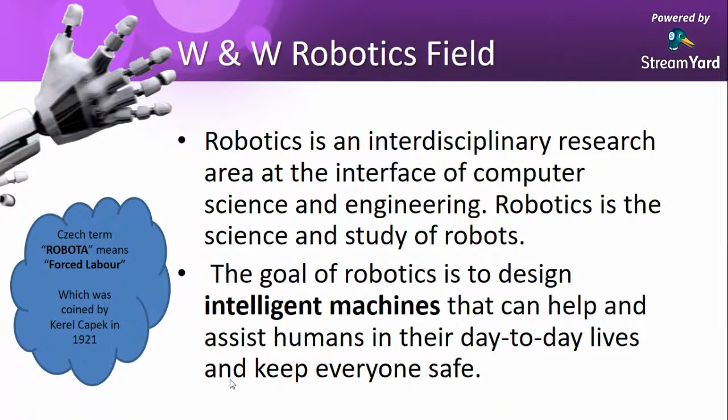We have different fields which I'm going to showcase in this presentation: kinematics, gears, programming, system thinking, environmental thinking, and all these different technical and scientific fields which collaborate and integrate together, and the resultant is used to implement and solve some problem. That is robotics - a complete merger of all different fields.

It's not a standalone field. It's a merger of different technologies, different engineering fields, different scientific fields - that's designing and art and all this stuff. If we have a piece of iron and it's not looking good, you won't buy it. I will show you about the Pepper robot - it's very beautiful, and all that.

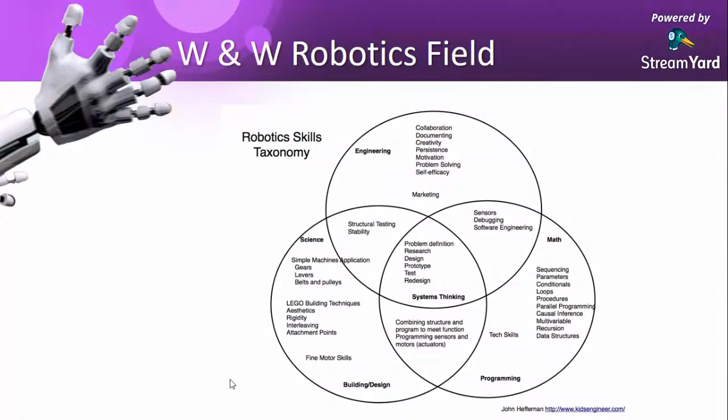Amazon has an average warehouse size of 400,000 square feet area, which is composed of about 73 canal in Pakistan.

The person doesn't go there, because imagine it's 73 canal minimum - Google and Amazon's website say the average size is 400,000 square feet. Just imagine if you had to go and pick that product from a shelf 70 canal far ahead, how much time would you need to go there, pick it, and come back to the shelf from where it's dispatched to the customer? It would take 6 to 7 hours just to complete a single product of an order.

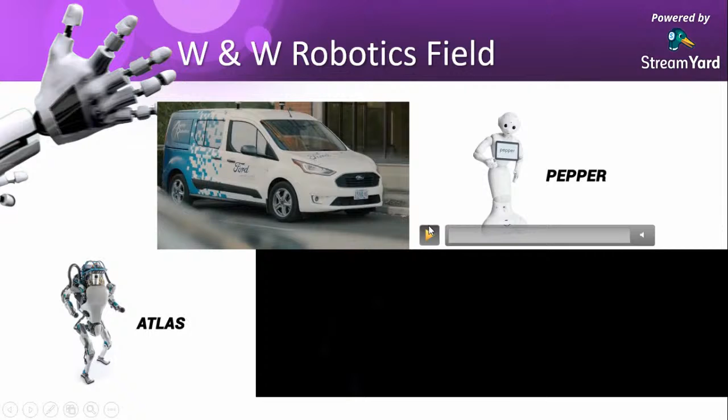On AliExpress, on a daily basis, the guy is just putting the orders on top of a robot. You have seen in this video that it just scanned, and after scanning, the robot will get to know in which hole it will drop that box. There are different holes on the shelf where robots are working. These are like bypasses which move to different countries and cities. They have to mark these outputs for dispatching, so it goes directly to the container to be dispatched to different countries and cities of the world. This is the mode of transportation or dispatching of e-commerce orders and products to the customer in real time.

This is one of the robotics systems we are regularly using, but in Pakistan we are lacking in all these areas. We are still using human labor for all these purposes, from teaching onward. Things are changing very abruptly, and soon we will have all these setups in Pakistan as well, but it will take time. I will tell you how we will get there, what my approach is, what my vision is towards this robotics field in Pakistan, and how it is currently growing. I will discuss this in a while, inshallah.

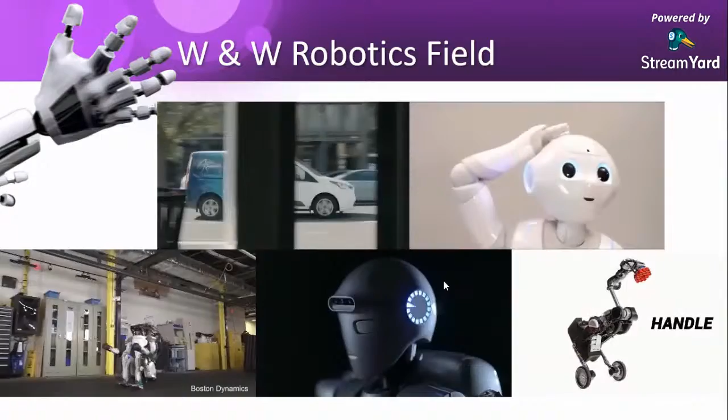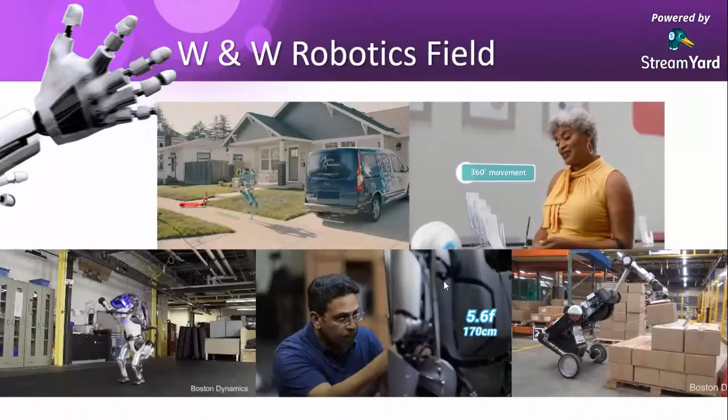There are different video clips I have put here for information. We have Digit on the top left side. Ford and Digit have collaborated for the real-time dispatching of transportation of orders, which DHL and different courier services are using.

This Ford car has no driver in it; it's an autonomous car moving in a city. Digit is the delivery boy robot that gets out of the van and delivers that box and order to the person who ordered it or whose delivery is couriered.

On the right hand side, it's Pepper, a very beautiful, intelligent, and famous robot. These are used for reception purposes and for different other purposes.

Wait a sec, sorry for the interruption. Yeah.

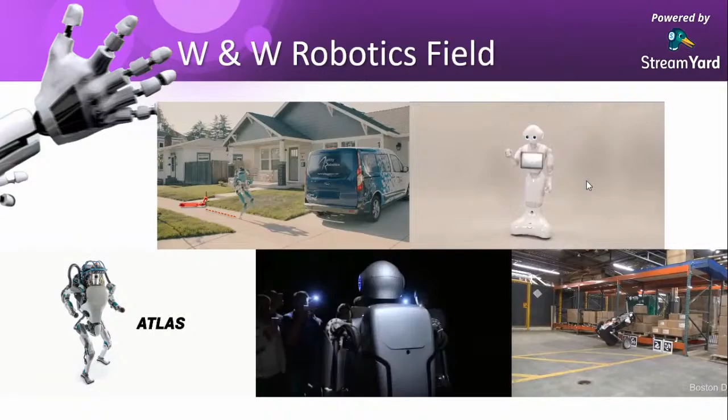It's very intelligent and emotion oriented as well. It smiles with you, laughs with you, gives you a piece of joke, and moves around with you. I've read that more than 40,000 Peppers have already been sold worldwide, especially in Europe. You can use it for mall purposes and different settings, and these are currently deployed in different malls, offices, and shopping centers and shops.

Here we have Atlas. Boston Dynamics is the world famous organization which Hyundai bought a few months ago. It's a very intelligent humanoid-based robot, this piece of iron—they call it a parkour as well. It moves, it walks, it runs, it jumps, and it's very intelligent. It does all of it by itself.

Here in the center we have Iran-based Surena, also a humanoid robot, intelligent, and it got famous within a few months. It was just launched in 2020, and due to COVID-19, they launched it earlier. It's still not in the 100% working stage, but they have released that version currently.

On the right hand side, we have this kangaroo tail-like moving robot. It's currently being used in warehouses in different organizations in Europe. So where we stand, we are still very far away.

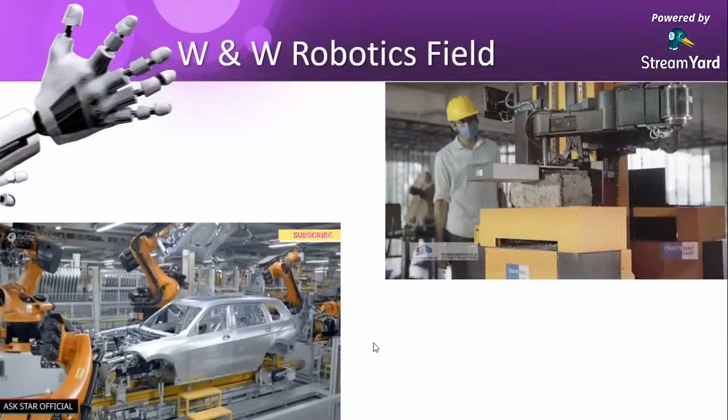Here I am showing you BMW and Audi, where in the Audi assembling unit they are using robots for welding purposes, for joining small parts to major parts. Robots are everywhere—they are using them for masonry purposes, for buildings.

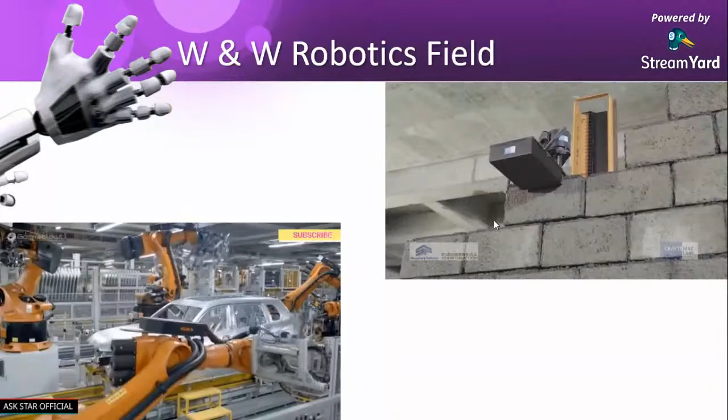We also have 3D printers, which are also a type of robot. So we are making buildings with robots, and we are doing masonry work with robots.

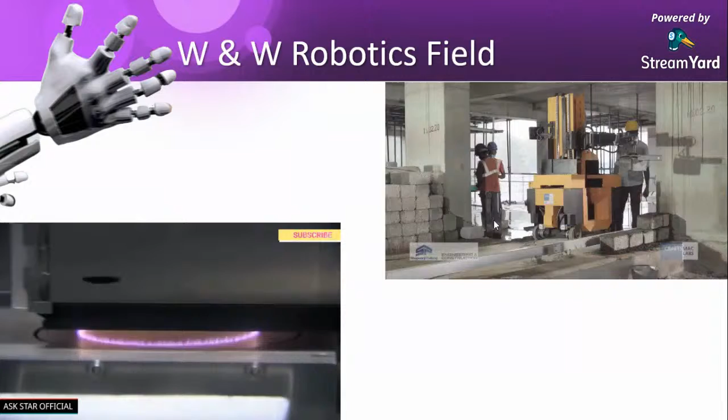We are having guards as a robot. We are making cars using robots. We have waiters and waitresses as a robot. We have teachers as a robot, integrated with Google, telepresence robots, and more.

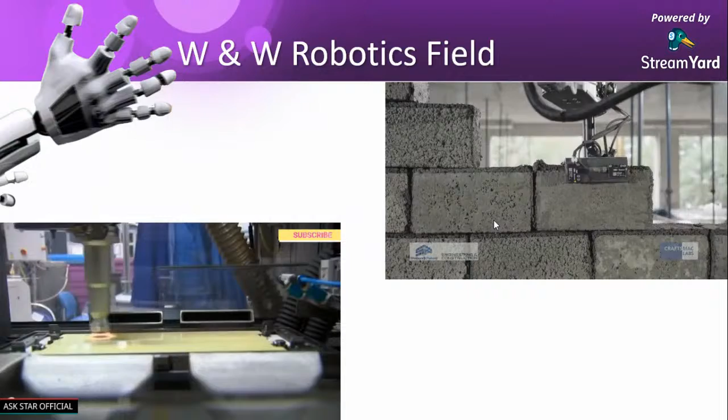We are using robots for all purposes from A to Z, but few are mature enough to be implemented in the practical and social field. We have robotic vacuum cleaners as well, like Roomba, very famous. So, as a topic, I have suggested covering the robotic field, from education to the industry in Pakistan.

Let me tell you about education, how robotics as an educational tool can be used and is being used worldwide and in Pakistan as well. I will show you that in a while.

Robotics is basically used to engage students in pursuing their career in the STEM field. STEM stands for science, technology, engineering, and mathematics.

Guys, I would love to interact with you, but I have no option here. How could I take a few questions? If you have questions, you can ask while on the go. But I'm not sure how to interact with you guys, it's like a one-way communication. I'm not used to this kind of setup, but let's hope so.

Due to COVID-19, we are bound to give online lectures like this. Let's hope for the best so that COVID-19 will diminish and we have regular life again. We will have seminars soon, inshallah. If you guys have any questions, please ping. I hope Zunair will provide me a few questions if you have any.

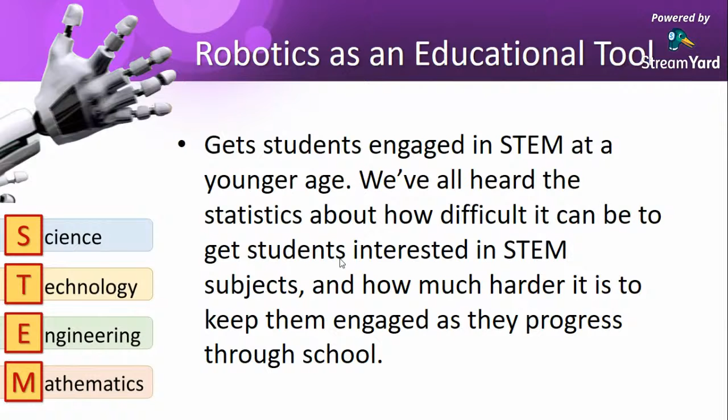I asked her the definition of the gravitational field, and she closed her eyes and dictated the whole definition to me. I asked her to bring a book so I could verify what she was saying, and believe me, she recited it word by word from that book.

I asked her, 'What have you just said?' She said, 'I have just told you the definition.' I asked her what the definition basically meant, and to tell me in Urdu what she had just told me in English.

We have a question. Let him complete this, and then I will ask that. Then I will answer that question.

She said, 'Sorry sir, I don't know about that, what was in that definition.' But she was 100% sure it was the correct definition. I was amazed that she didn't know what she had just told me.

So it's like this not just in the village but also in the city. I've met students from prestigious privately-run schools too. More of the students are used to cramming all the definitions, but they have no real idea what they mean.

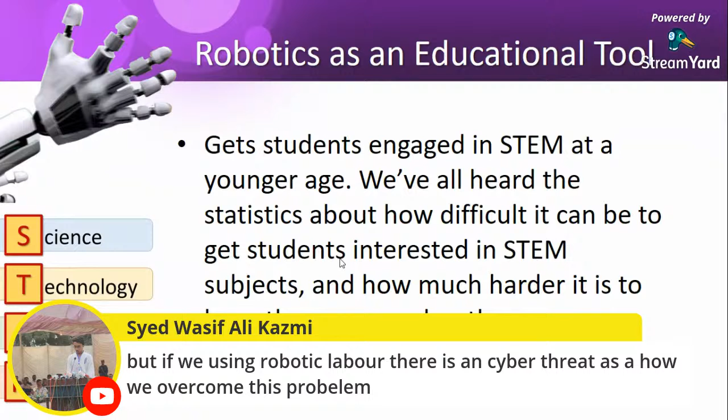STEM fields are basically about the practical implementation of all those definitions. Using robots and similar tools, we can engage students and help them develop knowledge through the creation, design, assembly, and operation of robots.

Children and young students find it very useful, amusing, and fun working with robots, like a piece of accomplishment. You feel like you just assembled all the pieces together, like in FLL or Lego robots. You assemble all the pieces together, then click on the laptop to program it using block-based programming.

After all the programming and assembling, it just moves, and you feel a sense of accomplishment: 'Oh yes, I just made a robot!' It brings students closer to education and science, creating a 'wow' effect: 'Okay, I have developed something, I have made something.'

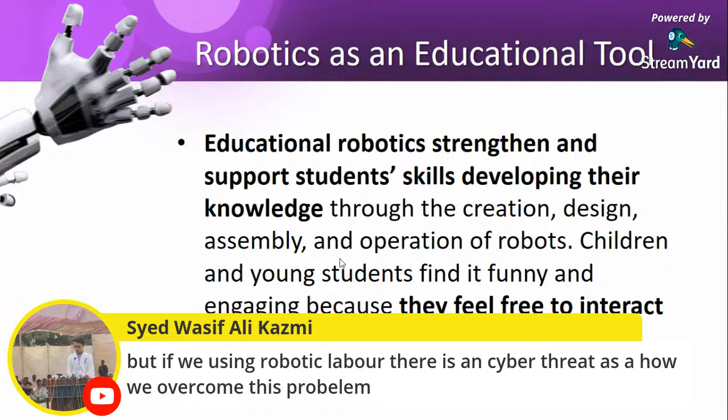Robots are very impressive, and it's given in a survey in the Times that more than 55% of students were more likely to select science subjects after engaging in these educational activities. So yes, robots are a very important, impressive, and useful technique in this era to bring students to the science field.

I've shared all this from the very small kids to the younger ones, to college A-level students. From the schools, all are using this STEM vision in my institute.

So there are very small kids developing their own robots, like four-wheel drive and two-wheel drive. It's very fun-oriented. Students are used to it, like, I don't want to go back home, I want to complete this project.

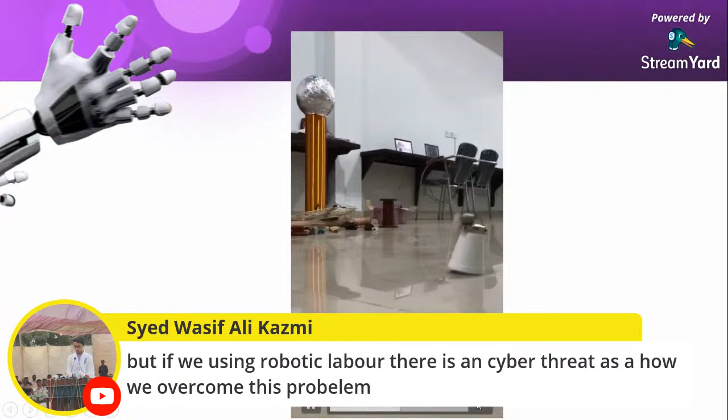It's very fun-oriented. Okay, this is a very simple robot. It's a brush robot, like a cup, a marker, a small motor, and an unbalanced piece of plastic merged to the motor that just moves. Students get amazed, like 'oh wow, it's moving,' but it's nothing, it's just a cup and a motor.

So these are the different tools which you can use to engage students in all these different activities.

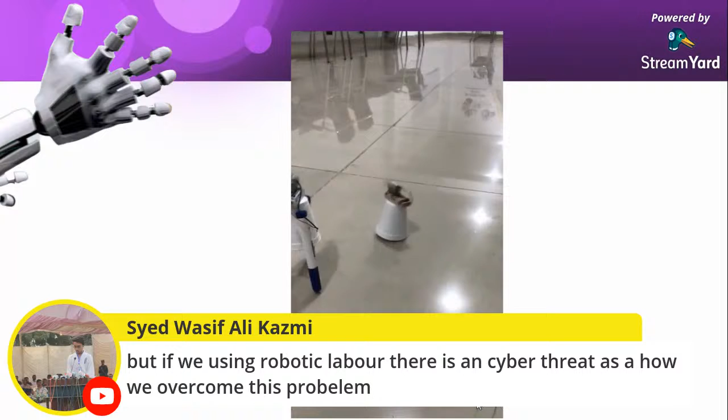According to Sir Anthony, an educational expert from the USA, children's robots are now one step ahead from the educational robot. It's like an educational teacher now.

A teaching robot like this is more friendly to students. It's like a platform which recognizes your facial expressions and uses pedagogical approaches, so that the student can learn more efficiently and grasp all the ideas, and so teachers can see how the student is performing in class.

These are all a merger of different flavors and small pedagogical approaches, so that you can use them for effectively delivering the concept and core ideas to the students.

In parallel, you're also understanding the outcome from the students, not just by them telling you, but by reading their expressions using machine learning algorithms. These are all things being used currently in Europe, for student-teacher understanding and delivery purposes.

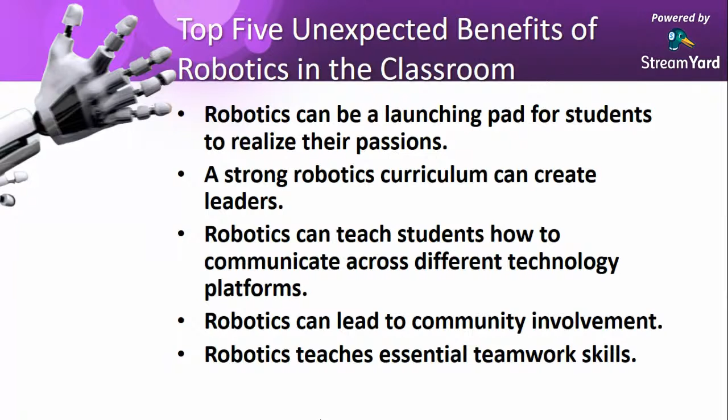Robotics teaches essential teamwork skills, definitely, through division of tasks among different students, then integrating all the outcomes from all the students to give a solution. Very good.

These skills are extremely important for students as they prepare for the 21st century workforce, because in this era we're not going to see the jobs, job markets, and job fields as we used to see in previous years. Things are changing very abruptly and astonishingly.

You guys see that we have been using human labor for certain purposes, and now we're using robots for that purpose. I shared the Amazon AliExpress warehouse example with you guys.

So yes, things are moving. Things are adopting all these different technologies.

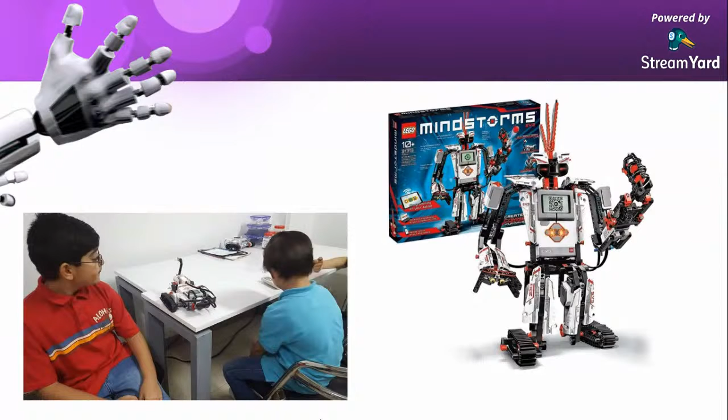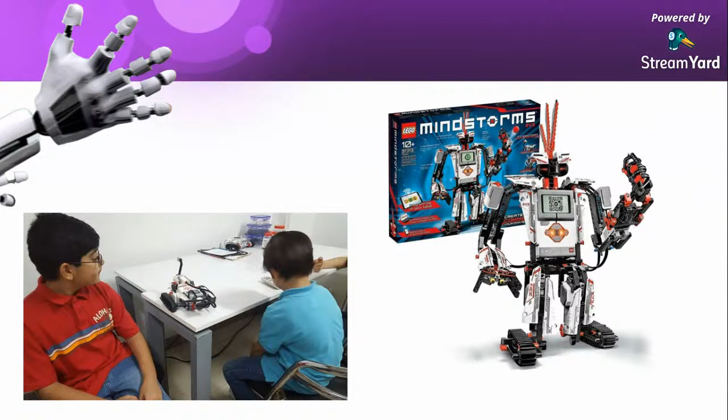This is a Mindstorms kit. It's more than 100 very small pieces, and students and learners in an institute use it to assemble and make different shapes and different task-oriented robots. In the middle is a CPU, a controller which we can program using block-based programming, very useful for kids. You can learn a lot from this, just imagine a 10-year old assembling all the small parts and making a robot.

It's a huge learning experience. It's not just about the programming or the assembling, it's about how you can attach different shaped pieces together and create something. It's a piece of achievement, guys. It's about the programming, the assembling, the idea, the problem we are facing, and for that purpose which kind of robot can be made from these pieces. It's very educational, very much about learning.

We have a different international First Lego League, FLL based challenge, which Pakistan is also participating in, and different others.

Okay, let me give you an answer. We have a few questions from Adnan. Is there any humanoid robot startup in Pakistan yet?

Dear Adnan, it's a very good question. Humanoid robots, no, because it's not about the startup, it's about the research phase. We are still in the research phase. According to me, none of a university in Pakistan is working on a completely humanoid based robot, like a 5 feet or 4 feet humanoid robot. None of a university or final year project from any field in any university is working on that. According to my research and involvement in this field, none of the universities or students are working on that, and neither is there a startup. We have different startups for robots, but not in the humanoid robot field.

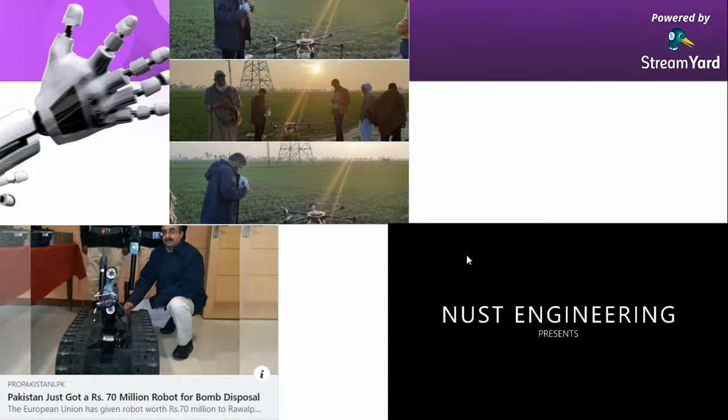Robotics in industry: NUST Engineering, NUST, I have shared with you guys the NUST. NUST is one of the institutes, they have a dedicated department for robots, the mechatronics department, and they have been working in this field for the past 5 to 10 years or more, and they have developed a few robots, integrating with the fields. Like we have an image here.

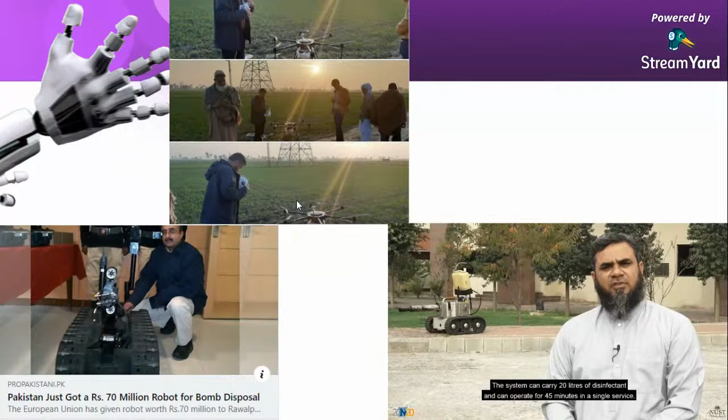This is Dr. Waqar Shahid, he is a very passionate guy, my mentor as well, my teacher as well. They have just developed this drone with the students. It's not a controlled-based robot drone, it's a completely autonomous robotic drone.

They mentioned this is basically a spraying drone. You just have to fill the bottle with it and give it a GPS coordinate, and it takes off, sprays all the fields, and returns back. So this is a complete robotic solution for the field guys, for the villages. They have been collaborating with kisans and farmers so they can spray the fields for better results. They've also surveyed that it gives more outcomes, more fruits or vegetables after spraying from the drone, because it sprays very precisely, which is used for vegetable growth, for food growth.

On the left hand side we have this bomb disposal robot at Rawalpindi worth 70 million, which was also developed by the NUST field, and a few were developed by the Sir Syed University guys. So this is what we have been using, but very little. I'm again saying that we are very far away from real implementation of robots. There's a very famous factory, the only one making all the Levi's jeans, Crescent Bahuman.

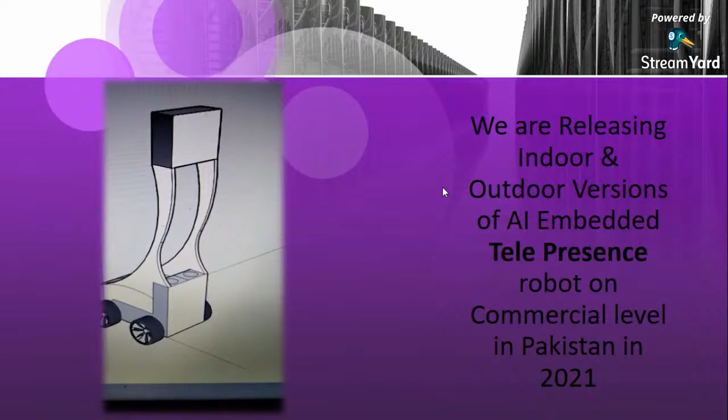We are disclosing this for the first time. We are going to release it in the first quarter of 2021. We are working on the telepresence robot, which has human facial expression learning and moves around. We already have some advance bookings for it as well. Alhamdulillah, so yes, we are working on this.

We need more students to get involved. We need more teachers and professors to do research, and for research purposes, we indulge all students from undergraduate to postgraduate in research. We give them all the tasks so they can develop research into practical things. This is a step-by-step process - how we can involve undergraduate students with college students, college students with university students, university students with postgraduate students, and postgraduate students with PhD level students, and then all the professors.